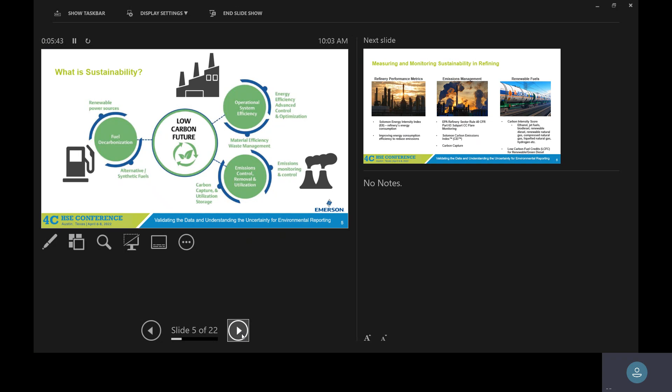And do y'all have areas where you're investigating, like carbon capture or other ways for carbon improvements? Okay, so whether you have it now or see it forthcoming, we'll talk about that, what the reporting requirements are looking like, and some of the challenges. So hopefully it'll be a little educational or futuristic about what could be coming your way. Let me move forward.

This is in particular a refining example, but I think it has similar applicability, and we can generalize it for your industries. As far as measuring and monitoring sustainability in refining, we have the Solomon Index, tied to what's called the energy intensity index around a refinery's energy consumption. They typically do that benchmarking every couple of years based on the complexity of the refinery and the type of crude they're processing. There's a standard benchmarking, so reporting in that space has always been pretty consistent.

Is anyone here in petrochemical? The refinery sector rule got applied to the ethylene side of the business for compliance, with very similar requirements in terms of accuracy on the flow rates, how often you have to report, and the calibration requirements. So you may be familiar with that in your space.

Carbon capture or carbon intensity score. This one seems new to some people or maybe forthcoming. In the US right now, there are state and federal credits, like fuel credits or the blenders tax credit around transportation fuels, so really diesel right now. There's something called renewable or green diesel. You may have heard how people are taking feedstock like corn and soybean oil and making it into diesel, and it is compatible with engines.

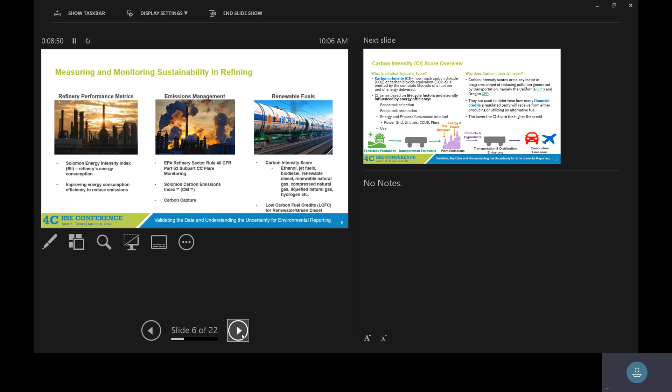My whole point in bringing it up is, even on the chemical side of the business, we're seeing people use renewable bio-based feedstocks now, compared to traditional petroleum coming in from a refinery. And at the same time for refining, or renewable natural gas, there's this whole talk of alternative fuels, hydrogen, different things like that. These all have some sort of carbon intensity. So we'll talk about what that means.

So carbon intensity is essentially how much CO2 is emitted from the complete life cycle of, in this case, a fuel. For green diesel, that is literally from seed, the agriculture, the crop itself, all the way to tailpipe emissions. Typically for green diesel, it's about an 89 to 90% emissions reduction across that value chain. It's more expensive to produce renewable or green diesel, and that's why we're seeing government incentives to make it profitable for refineries or other operating companies to produce it at scale compared to petroleum-based diesel.

So the reason carbon intensity is so important is because it ties to how many fuel credits they get. It varies based on the type of feedstock they select, and on how efficiently you operate and how many emissions come with the actual conversion of that bio feedstock to a fuel. But there's also opportunity, which your companies might be investing in with some of these fuel pathways, to improve it beyond feedstock and processing, on the carbon capture side, emissions reduction, or putting renewable power on the grid with how you manufacture.

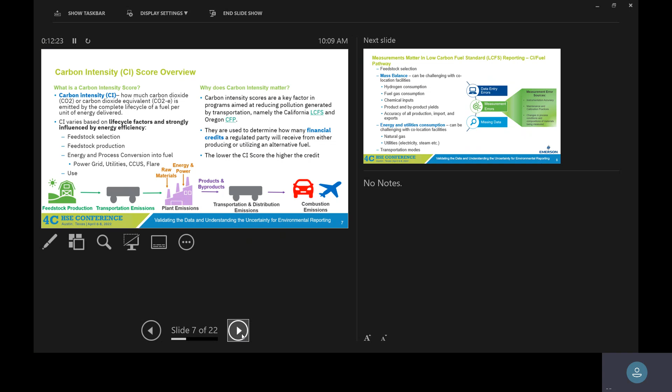So let me move to the next. Okay, so whether it's a low carbon fuel standard or any sort of reporting you guys do, I think you guys can heavily relate to the fact that data accuracy and measurements matter. So do y'all ever work with your yield accounting teams that would pull together your mass and energy balance for your kind of nature of work, right?

So in the case of some of this credit reporting, in the past, usually yield accounting and energy balance was nothing that ever had to be reported to a regulatory agency, right? It's more internal to corporate, to finance, your own sort of accounting. In the case of renewable diesel production or some sort of bio-based production, you are actually required to report all your utility and your consumption, your hydrogen use. So that's different; in the past it was maybe kept for internal purposes, or your plant. But for some of this credit reporting with the government, it has required your mass balance, your yields, everything like that.

What's tricky is if you're at a facility where you're co-sharing. For example, you have a renewable unit or a carbon capture attached to a refinery, or you have multiple facilities feeding into carbon capture, you have to know that allocation, right? That's what's tricky: how much is going to just general refining and how much is actually going to some sort of renewable unit. So there's a lot that goes with the reporting. From a measurement standpoint, which is where I play into with Emerson, is the instrumentation and understanding the gaps that you guys see with your accuracy or your data. I'll go into that.

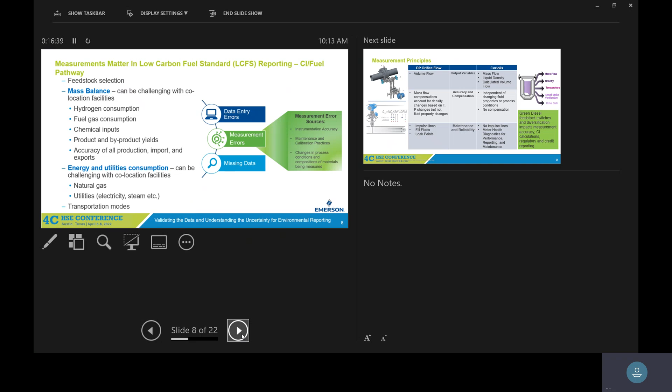So how many of you have ever heard of these type of meters? An orifice plate? Yeah, that seems to be the most common in most industries. How about a Coriolis meter? Okay, so starting with the orifice meter, this is pretty much the most common baseline, well-known, well-established flow measurement meter utilized across every industry. Super versatile, super cost effective.

How many of you maybe have had sources of error and accuracy because of an orifice meter or a traditional volumetric? I see some heads nodding. Okay, so if you look at this flow equation that I have by this orifice meter, that is the equation to calculate mass flow from volumetric flow. And you see all the different variables, and you can see how much the variables are impacted by a change in differential pressure, pressure itself, or temperature. So you see all these components that feed into this equation.

And so what is very tricky about orifice meters is they're very reliable for control, but in terms of high accuracy applications, for example, if you have to report fuel gas flow consumption, natural gas consumption, if you have permitting issues off of a certain process unit, a lot of times, especially in a refinery, it is an orifice plate meter. And so depending on if feedstock changes or if you're running different pressures or temperatures across that unit, you can have inaccuracies that come through your reporting.

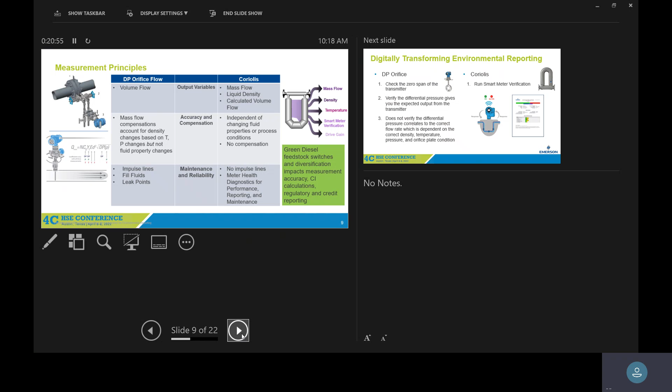And so on this next slide, I'll talk a little bit about that. In the past, what your field team would have to do for reporting and meeting the calibration requirements, and this is the same whether you did the refinery sector rule, the ethylene rule, or any EPA reporting, whatever the calibration is set, whether it's annual or biannual, a lot of times you can go with a manufacturer's recommendation to bypass having to pull the instrumentation offline every year or two.

But traditionally, if you have an orifice meter, these are the steps that are required. You have to zero span the transmitter. You usually have to maybe pull the plate offline and inspect the condition. You have to measure the plate and see if there's any wear or tear there, because all of that impacts your accuracy.

And so these are all the steps, versus now there are online diagnostics for some of the more advanced meters. So for a Coriolis meter, for example, there's something we call smart meter verification, which allows you to verify the meter online. Have any of you ever used this in your facilities or are familiar with this? Okay.

So this is actually also available for mag meters. I know someone had water as well. Have you ever used it on a mag meter to verify the accuracy online without having to pull the meters offline? Or do you know? Okay, that's okay.

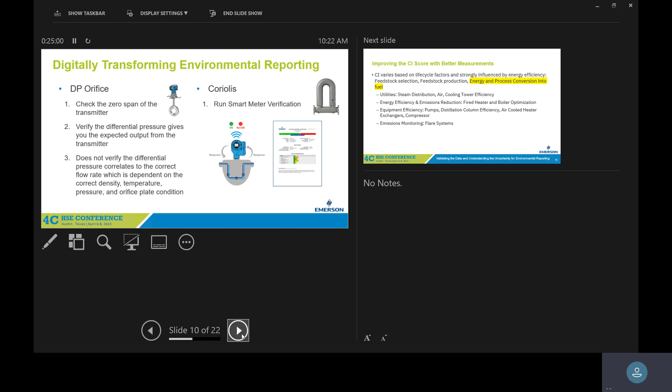Okay, so the other thing, and this is for your awareness, in terms of education, if carbon intensity hits your plant in the future: one component of what it's impacted by is the bio-based feedstock, but the big portion is energy and process conversion. But regardless of whether you're doing any carbon reporting, in terms of falling under ESG, reducing emissions and energy go hand in hand, right?

So the projects go hand in hand around that. So these are kind of the areas in terms of improving energy efficiency in these sort of spaces. And at the same time, if you improve your energy efficiency and reduce emissions, it helps you improve your carbon intensity score. And if there are credits tied to that, then there's a financial incentive to it as well.

How many of y'all have facilities that are participating in the Energy Star program for EPA? Okay, so have y'all just recently signed up for the challenge or been part of it for a while? Because they just relaunched a challenge, I think last year. Are some of you not familiar with the Energy Star program that I'm talking about?

Okay, so the EPA Energy Star program, you might have actually seen it on personal electronics like TVs or alarm clocks, but they also have it on the industrial side. It's over about 30 different industries. And they have launched this Energy Star challenge where there's no financial incentive. It's kind of more like a stamp that your company can put.

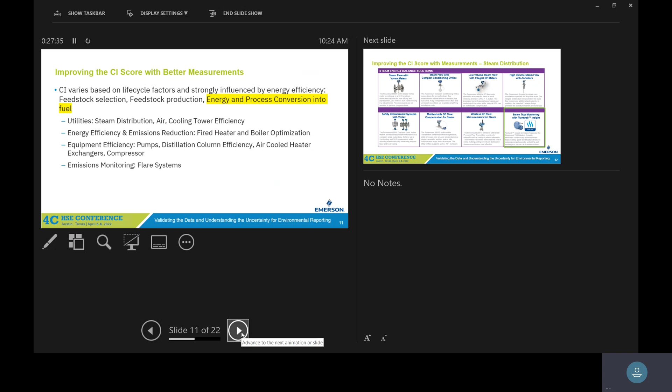So I wanted to touch on some of the different ways we're seeing HSE and environmental improving, whether that's energy efficiency or emissions reduction. So how do you monitor steam traps today in your facilities? Do you have issues with leaking steam traps? And how often are they inspected?

Any comments there? I'd say typical fail rates I see are about 5 to 10% of steam traps failing in a plant a year, but maybe once a year they're manually inspected. Does that sound right? Yes. Yeah. Do you know how many typically, like 5 to 10% or about? Yeah. Oh, wow. Okay. So it's gotten better.

So question: do you know how much some of those leaking steam traps impact your boiler duty, if you have a boiler? The reason I illustrate that is because leaking steam may not seem as big of an issue. There may be some quality impacts on the process, on separation for a distillation column, but depending on how much steam is leaking out of those traps, you're then having to put more duty on your boiler to generate the steam that's being lost.

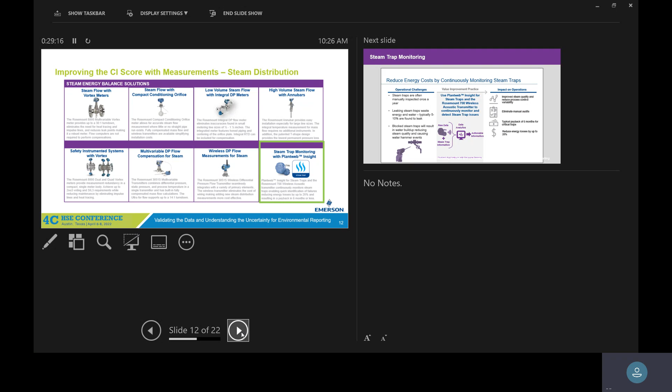And so one of the ways we're seeing people from an HSE standpoint improve this: what he brought up was the traditional way, where people bring someone out every 1 or 2 years and they manually inspect all the steam traps. And the average we see is about 5 to 10% in terms of failure rates. Leaking traps usually are traps that are stuck or have condensate, like water that has built up in them.

So the newer way that we're seeing is people prioritize critical steam traps, whether that's tied to a safety system or in terms of volume of the steam. And there's a new way, acoustic monitoring. How many of you have implemented that in a plant or are familiar with that? People put acoustic monitoring on their critical steam traps. And this allows them to, number one, identify where the steam trap is, because there are hundreds and thousands of steam traps in a plant when you think of your steam systems.

So it helps pinpoint, it helps early detection, and in terms of maintenance, you can detect right away and identify those leaks or those issues. So this is what I consider a very much low hanging fruit, where instead of having to bring someone out once or twice a year or use your operating team to go and have a schedule where they're inspecting, this has allowed people to act more quickly, as well as reduce energy losses.

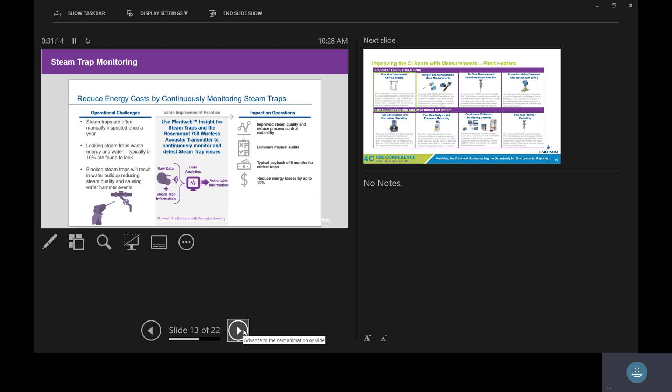And at least for the refining space, we actually have a calculator based on the refinery configuration as well as industrial data and costs that we can use to estimate what the savings would be there. So we've done a lot of these justifications for steam traps. So that's one of the newer ways we're seeing people improve reporting or try to reduce boiler duty emissions.

This other one is kind of interesting. So how many of y'all have fired heaters in your facility? Yes, no, a few over here. Okay, so in a refinery, the EPA had data that came out around how much a fired heater contributes; combustion is about 63% of the emissions for a refinery. Do you know how much your fired heater contributes to emissions or energy at your facilities? Typically, I'd say they're probably your biggest single asset consumer or emitter.

So a refinery averages about 20 to 40 fired heaters. So the contribution to greenhouse gas emissions is significant, but a single ethylene fired heater is massive as well. So it's usually your biggest contributor. So some of the ways that we have seen people improve: if you can improve the combustion control, operate with less excess air and less fuel consumption, that really hits in terms of your emissions.

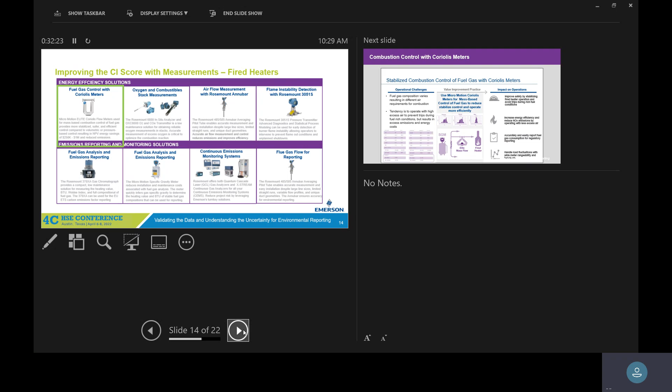So this one is actually interesting. There's a fired heater committee at API, the American Petroleum Institute. They have all these design and operating practices. For fired heaters, they look at safe operation. And they did this study, which I'll talk about, but they were investigating it primarily from a safety standpoint of how to prevent heaters from tripping, what's the best control methodology. But at the same time, they wanted to look at the economics and the environmental impact.

So for those of you that have fired heaters, do you know if you're running fuel gas or natural gas? Fuel gas, both. Okay, so especially if you're doing fuel gas, I think y'all can attest to how much the composition and quality can vary, especially if you're taking off gases from your facility and dumping them into your fuel gas system. There can be a lot of variability. Natural gas tends to be more stable in quality. But if you're using fuel gas for your heaters, the fuel gas quality impacts the amount of air you need. So that's where the variability and control comes in.

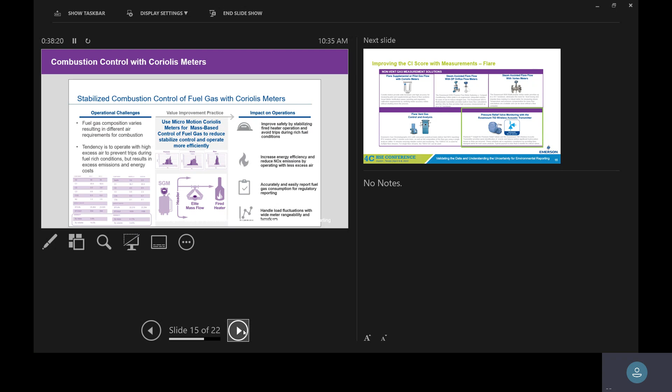So I'll take historical gas data from a chemical plant or refinery, and we can actually run it and show you if there is a net present value, a return from an economic standpoint, and how much that target O2 can be lowered. In some cases, depending on heater duty, it may not be economical, but in other cases it is, so we can run that business case as well.

The other area is very similar to steam traps, what we talked about, sort of the same concept. For pressure relief valves, are any of you guys monitoring? Are you doing the same sort of thing where your operators go into the field and look for leaking valves, or do you try to use the control system? Do any of y'all have online implementation of monitoring your PRVs, or the ones releasing to atmosphere or anything like that?

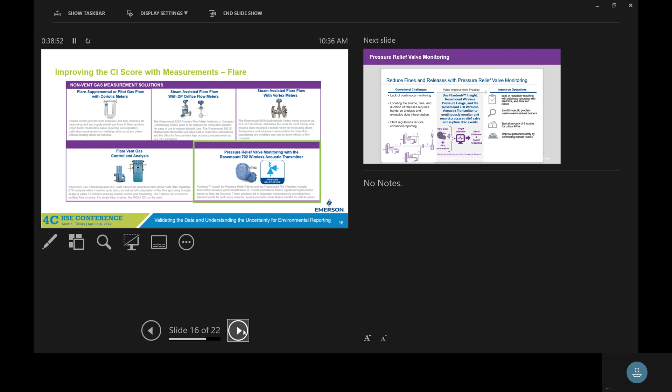Anybody? No, don't know. Okay.

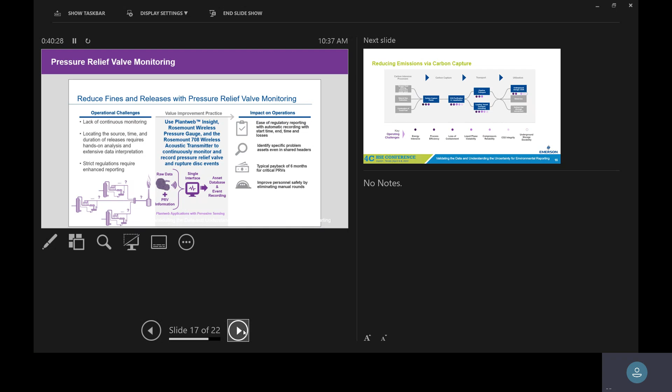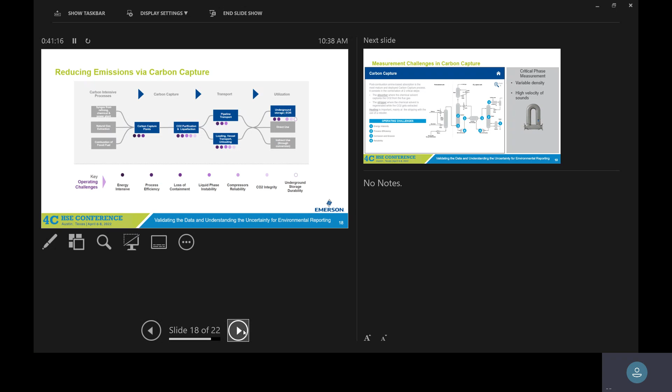Nothing has materialized in this sense, but one of the big things about carbon capture is that measuring the CO2 being captured is very challenging. It's a very difficult measurement because of the critical phase it's in, the variable density and the high velocity of sound. So this is another area where people are having to invest in better accuracy, using Coriolis meters.

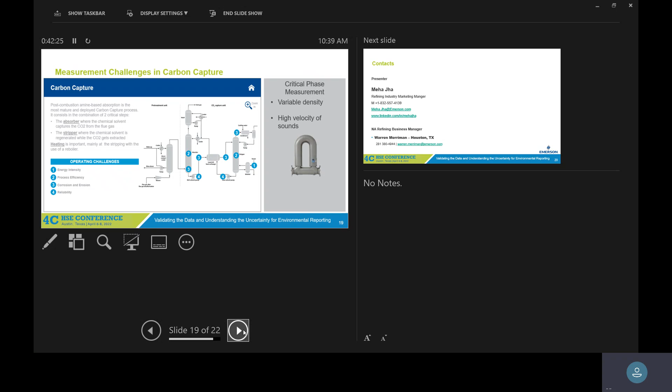I'm just trying to make you aware that with some of this new sustainability work, there are newer challenges coming in on the measurement side that weren't previously there. Whether it's feedstock variability, or accuracy in reporting, whether to the EPA, for carbon intensity purposes like the CI score, or for credit optimization. These are newer measurement challenges that may not have hit your desk before but might be required for reporting. At the same time, things like acoustic monitoring or using Coriolis for combustion control are newer ways people are improving reporting, from an early detection and accuracy standpoint. So that is all I had for this presentation.